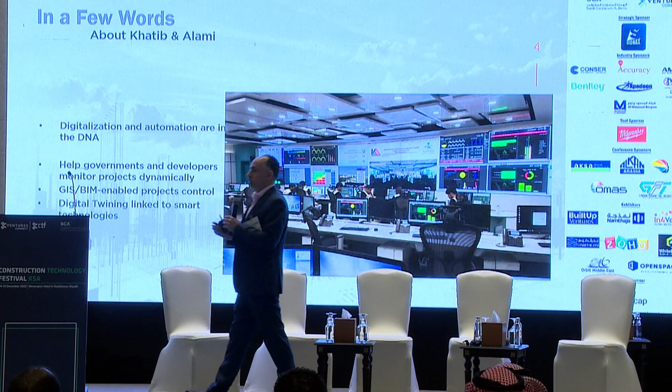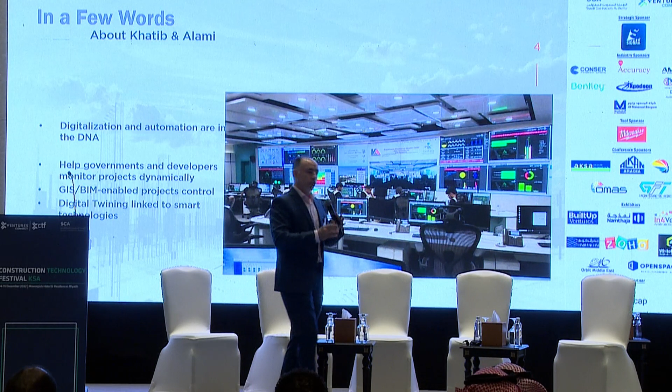We started by figuring out who had the capability to work as an engineer and as a BIM developer. We found like one or two, then hired some others, then embarked on a training program which took us almost a year to train interested people.

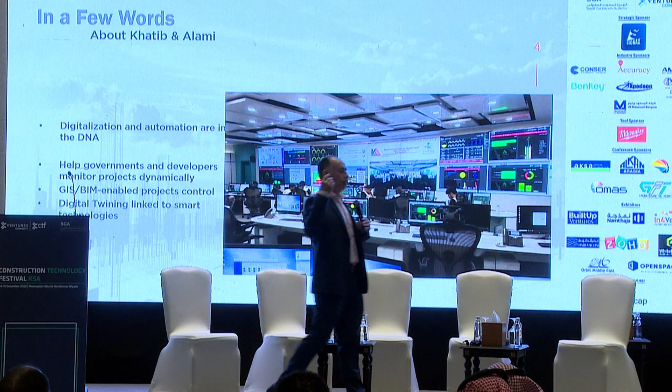We discovered that within the company there are a lot of people who are interested and capable. Now we have more than 20 developers—real developers—using Dynamo, Rhino, Grasshopper, and other technologies, even C#, to develop applications for BIM.

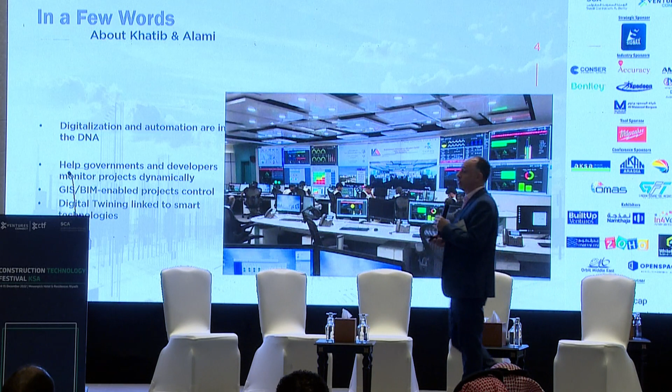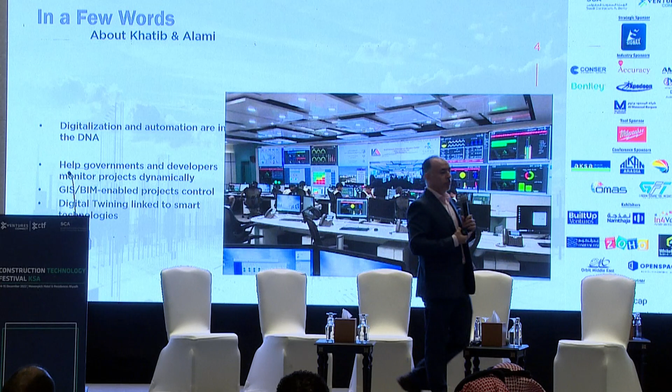We automated in some departments—like the structure department, we automated the process of structural design by 30 to 40%. This is happening as we speak, and we're going even beyond that, developing our internal in-house generative design platform.

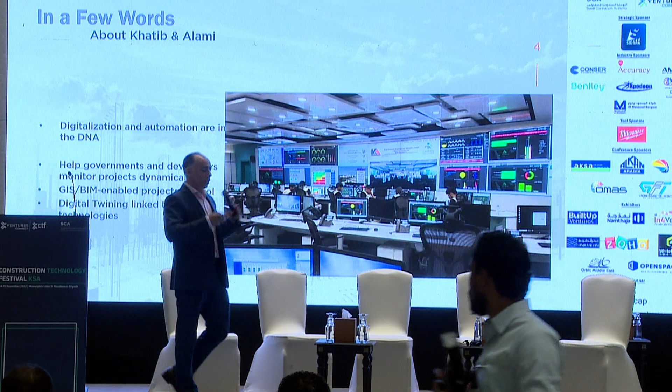The seeds started a few months ago, and now we have more than one practice—one on a project level, another on the company or service level. And the use cases we'll show are among the technology achievements we have accomplished.

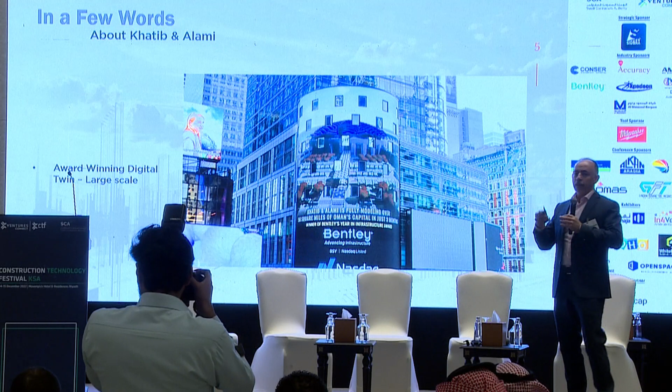This is a digital twin project we implemented in Oman, done with Bentley, and the project is complete and operational. We're talking about the technology, but more importantly, about implementing the technology—this is what matters.

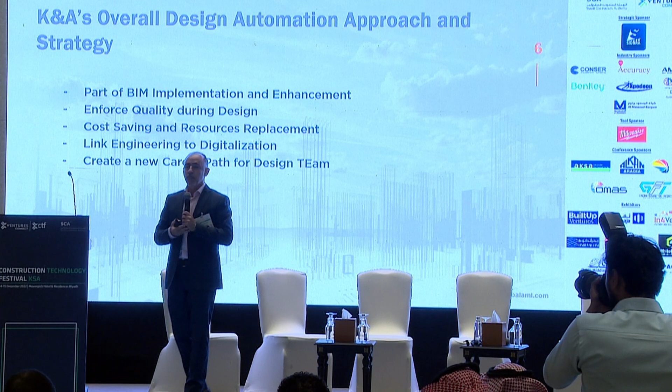BIM has to be part of the digital transformation strategy. It should not by any means be part of IT alone, because it has to be part of the vision. We need to move into digital space. So we need to implement BIM as the basic platform that we need to have. Having implemented this, we move to the use cases.

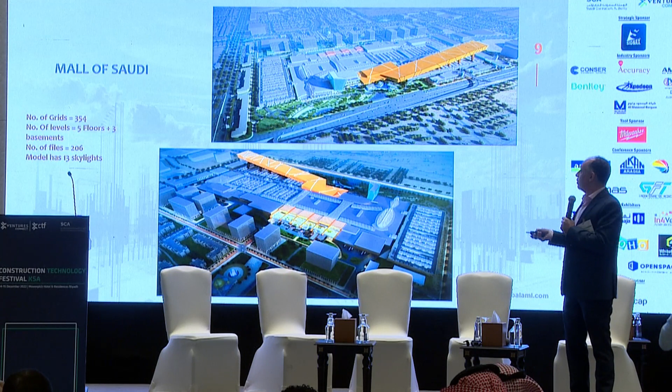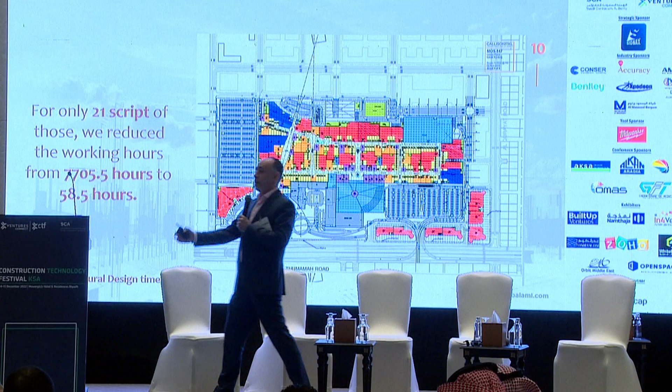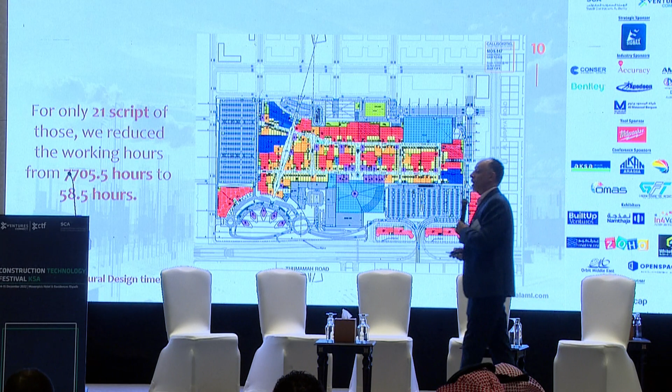The first use case, and I'll go simple then complicated—the third one will be more complicated. So the first is the Mall of Saudi, done in 2018. In this project we created 24 Dynamo scripts and saved 40% of the architectural work. We saved more than 7,700 hours compared to doing things manually. I won't go through the scripts today, but the overall saving was almost 7,700 hours by automating so many aspects of the project.

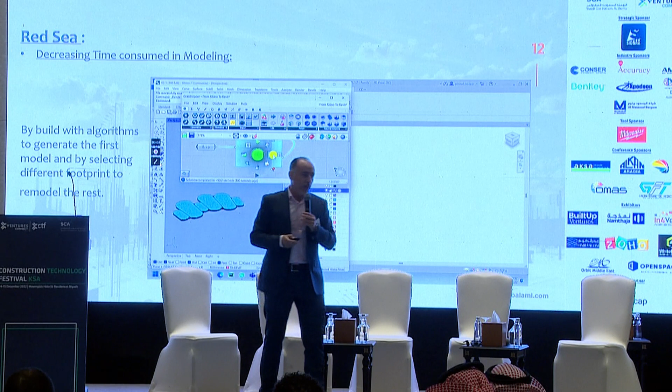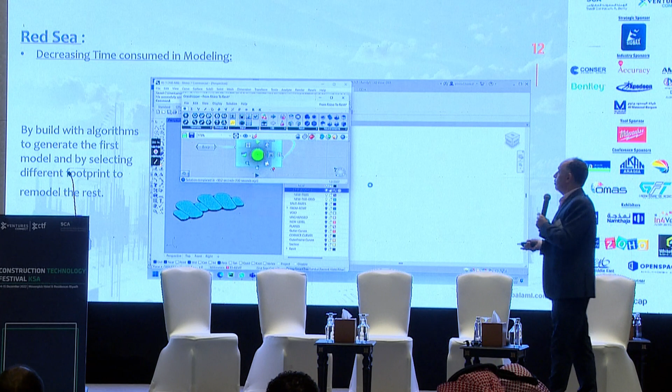The second use case is the Red Sea. Here we have a lot of pneumatic shapes, sometimes tents or different shapes, and these shapes cannot be worked as engineering or as a perspective—it could not be done in Revit. So even doing a comparison, it cannot be done in Revit. We needed about 33 days to finish manually, but they actually cannot be done manually. So they were done in 1 day, giving us a 97% saving.

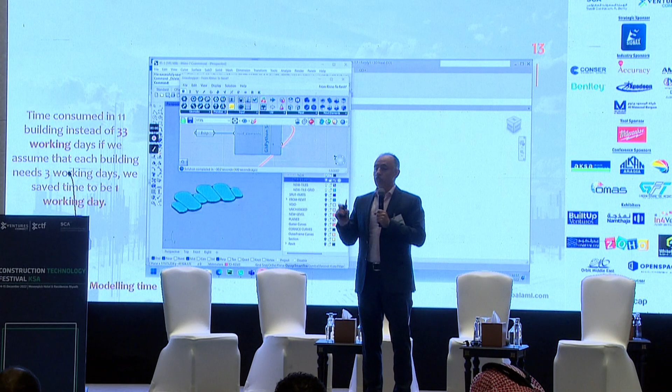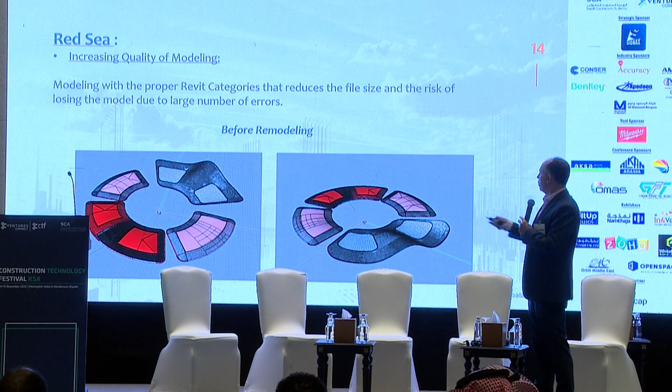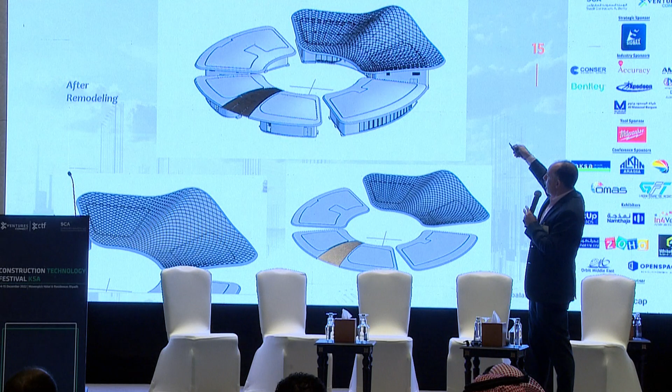This is done using Rhino and Grasshopper, with an architect doing this. The beauty of it is we're not bringing somebody from IT to do it—we have architects and engineers working in development to deliver the final product. You see some of the shapes, and this is the final modeling: this is when we received it, and this is where we modeled it. Every single piece is modeled—it's in 3D, we take it to Revit, and we can quantify it and do any operation, cross sections, whatever, in Revit later on.

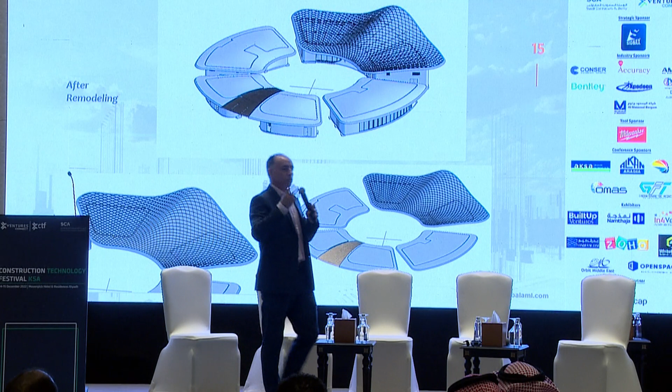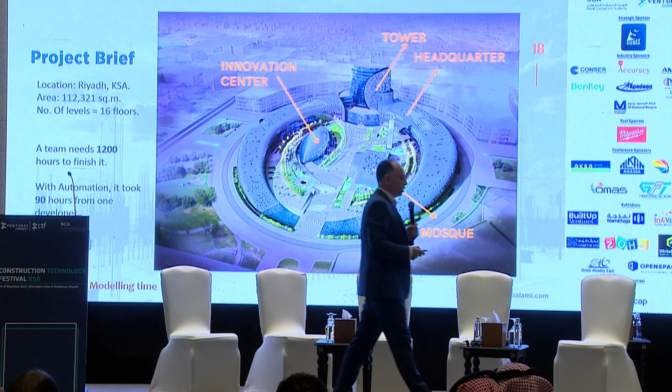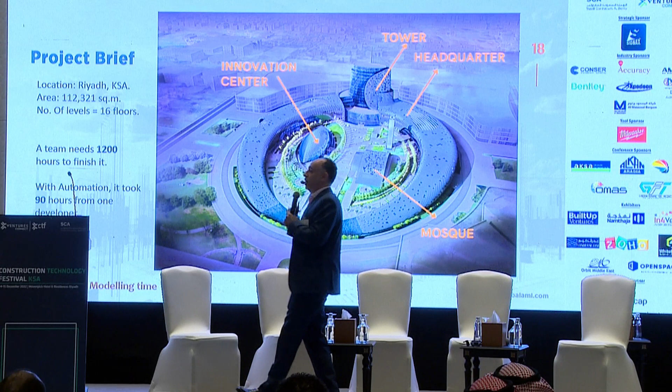The third case, which is more complicated, used many applications—the STC headquarters. In this project, the shape itself, if we want to do it in Revit, cannot be done. So the question isn't whether it can—it cannot. Then the comparison, assuming we could do it, is how much time we'd need: about 1,200 hours, but we did it in 90 hours. So we saved about 92% of the work.

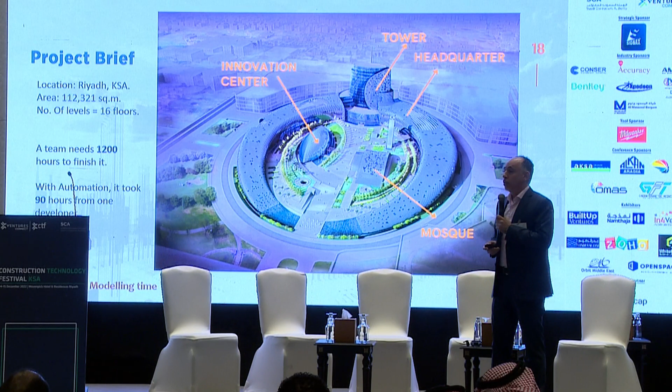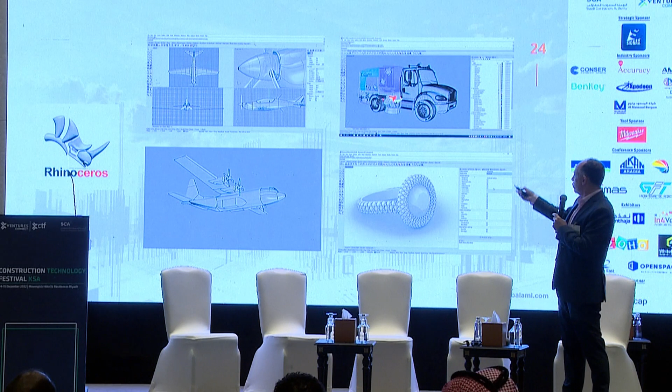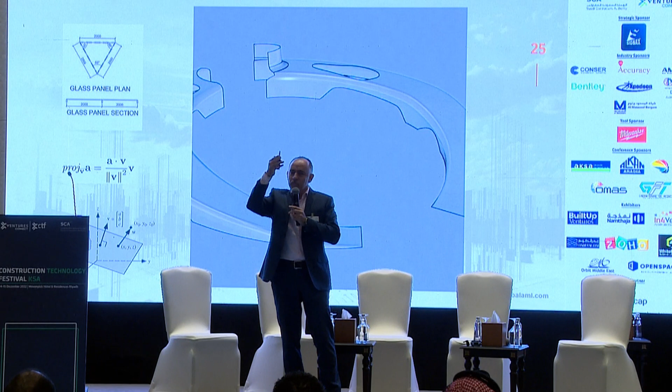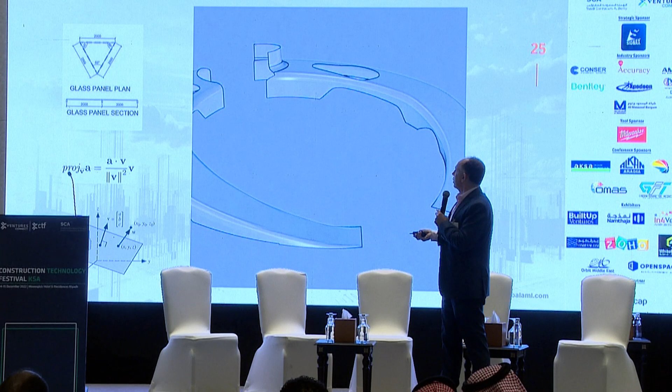This is all done using parametric design. We specify the skeleton, we build the model, and all this is done using programming—nothing drawn, no drafting, no modeling using Revit. We later take it into Revit. For each one, we use Rhino with other applications and specify all the equations we need. We categorized and created 8 triangles, each following a certain equation, all the same size across the model, giving the same angle, same size, and same formula using Grasshopper and Dynamo.

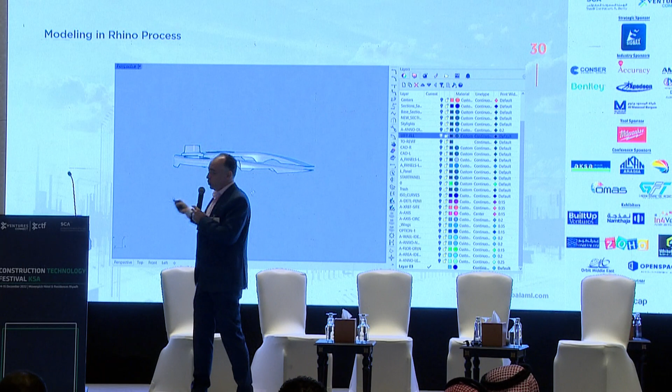From there, we moved the model into Rhino. After finishing, we move it into Revit, and then develop it, add to it, and put in materials and renderings or whatever. These are the three cases that, because of time, I wanted to share with you today—maybe we can elaborate more in the questions. Thank you very much.